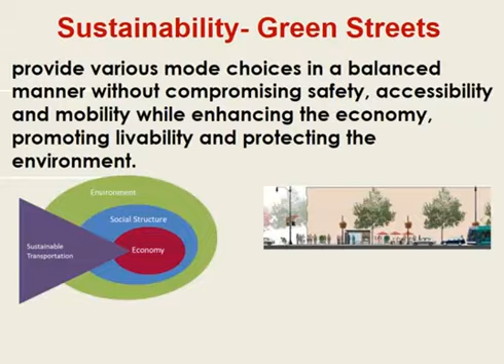We have done and started a number of green initiatives at the department, and I will go through some of those briefly.

Our first step was establishing an environmental policy. Based on that, we established an environmental management system. Those of you who are familiar with environmental management systems, we followed the ISO 14000 structure. We also established an environmental policy and process in the department, basically following the federal regulations, and created a manual based on that.

We have implemented context-sensitive solutions at the department. The department has a complete streets policy. We also developed a sustainability plan a few years ago. And the most recent plan that we have started is the climate change adaptation plan. I'll go through those shortly as we move forward.

We have recently released our LID standards, and those of you who are familiar with the Anacostia waterfront, we did create our design standards or guidelines for that area.

There are a number of people who work in the department on all these issues, so I'm just presenting a lot of those. The credit belongs to everyone who works on them, especially the stormwater branch, who's not here, but they were nice enough to give me some slides to present today.

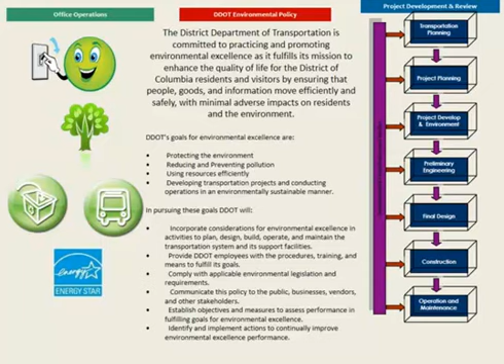This document was released almost 4 years ago, and the plan itself asks for an annual reporting mechanism that can be used to improve the process.

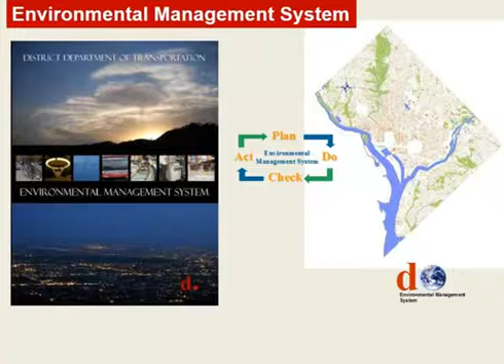The next thing that we developed was a sustainability plan, and based on that we highlighted 8 key areas: promoting transportation and land use, improving modal choices, effective cost assessments and decision making, improving DDOT operations, protecting the environment, conserving resources, developing climate change adaptation, and promoting livability and safety.

Based on those focus areas, we have developed performance measures that can be monitored.

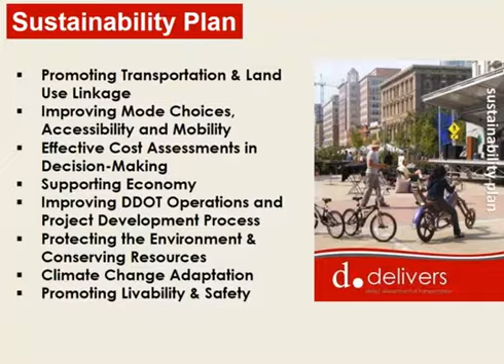A few years ago, Federal Highway was very keen on implementing context-sensitive solutions. It is a great way of actually making your projects sustainable. We worked with Federal Highway at that time, and we were one of the first few states after the first 5 pilot states to start using this process in our project development system.

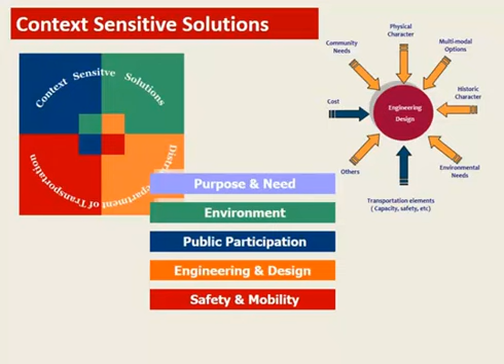Since the department uses federal aid funds on a number of projects, we also have to comply with federal regulations as well as local regulations. Based on that, we created our environmental process manual a few years ago, which includes all of our processes to comply with the requirements of NEPA, Clean Water Act, Historic Preservation Act, and a number of other laws and regulations. We constantly update it with new coming regulations.

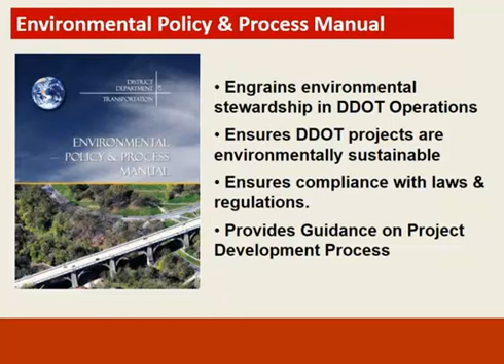The last update was done only last year, and actually all of these documents are available on our website if you want to take a look at them. Our most recent plan or project is the Climate Change Adaptation Plan.

There's a lot of focus right now on climate change, particularly in the area of climate change action plans. Ours is a little different - this is where the Department of Transportation is going. If you talk with AASHTO or Federal Highway, it's much more about adaptation now than coming up with action plans. We started this project last year and finished it in December.

The plan was released in December and it's on our website. In that process, we looked at the state of the art and the state of practice. There are a number of climate change indicators, as you know: temperature, sea level rise, precipitation. Those of you who were in DC during Snowmageddon saw that, or the recent thunderstorms and hurricanes we faced. Based on the review we did, we found 3 key areas that actually affect DC the most, and it will depend on your state or city. But for us, temperature, sea level rise, and precipitation were the 3 key areas that affected DC the most.

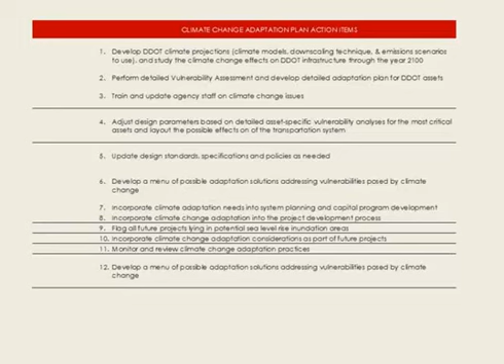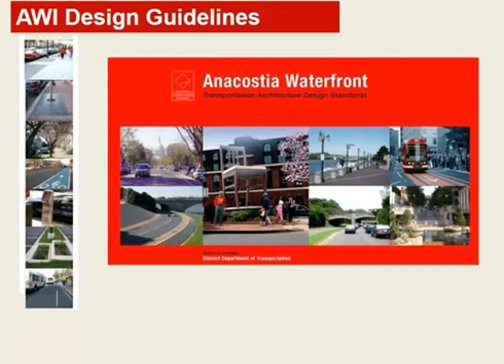This document is also available online, and you may have seen this repeated many times in our presentations. Low impact development is actually one of the key areas we also work in. We have a stormwater branch, which is the lead on low impact development, and they recently released our new LID standards, which we did not have before. I know Pete Hill from DOE is probably going to speak more to that, but I just want to cover that briefly - we do consider low impact development in our transportation projects, and we've been successfully using them.

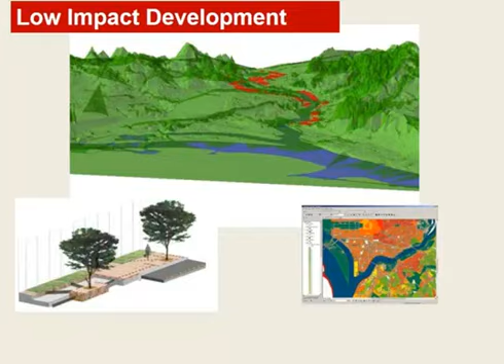Some example projects.

The first one I was going to highlight is the Klingle Road project. This was recently completed, and one of our most controversial projects - it took us almost 10 years to get it through the environmental review process. In the end, the design we came up with would enhance the stream that runs parallel to the abandoned roadway. The roadway will be converted into a bike trail, and a law was passed asking us to actually convert the roadway into a bike trail.

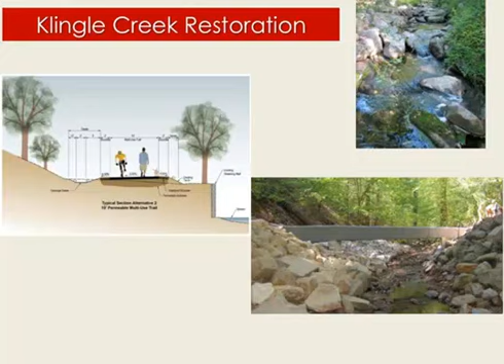However, in order to make the project work, we had to work with National Park Service, EPA, and DOE, and come up with an innovative solution for the Klingle Creek, which runs parallel to the right-of-way. We ended up enhancing the stream itself - almost half the cost of the project is for stream restoration and capturing stormwater runoff, not from the transportation right-of-way, but from the adjoining land uses. That was one of the key things that helped us get the project through, because without the stream restoration and enhancement, the project likely would not have been able to move forward. That was one of our key successes in 10 years or so.

The Nannie Helen Burroughs project was one of the Green Highways Partnership projects. Dawn and her team helped us a lot on that one. It also received a grant from EPA to implement stormwater management and LID practices. The project is almost done - I think it's done - and included a number of LID techniques, including bioswales and bioretention cells. This project is in the northeast area near DC 295.

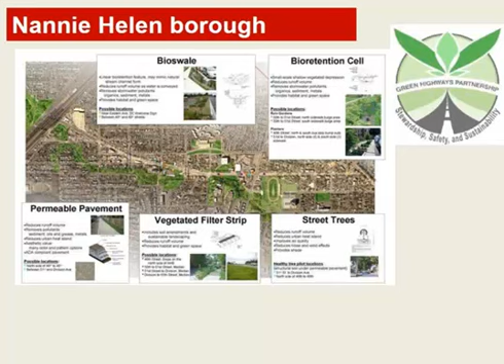My last slide is about Oregon Avenue, which we recently completed. This is again a roadway which runs parallel to a stream near Rock Creek, actually runs parallel to Rock Creek as well. Stormwater has been one of the main issues for the deterioration of the roadway. Again, it took us many years, almost 7 to 8 years, to get this project through. However, we came up with some innovative solutions for this project.

We worked with Dawn and her team on this one too, and came up with managing the stormwater in the transportation infrastructure by using spot LIDs, but also incorporating tree boxes as LID units. We were able to capture and meet all the 1.2 inches retention standards, but were also able to maintain the transportation interest by getting the project through.

It took us many years to get this project agreed upon by DDOT, NPS, and Federal Highway - that was one of our key successes. Again, looking at the project through sustainability and stormwater management actually helped us move the project through. And that was all I had.

I do want to acknowledge other people who actually helped me with these presentations - Meredith Upchurch and Reggie Arno from our stormwater branch, who do a lot of work in LID and stormwater management.

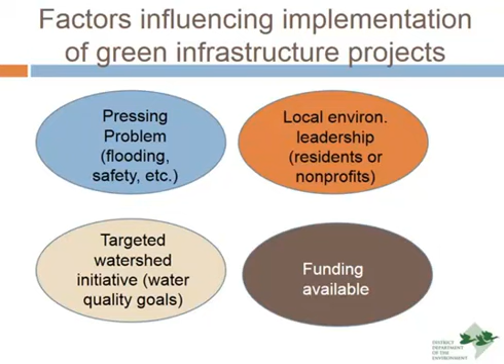Okay, next slide. Oh good, there, now it's up.

Additionally, I'm going to discuss these design charrettes, but also, through a separate process, DDOE worked with communities to install LID practices through a program we called River Smart Communities. This is kind of a unique feature of what we're doing here. I think the small-scale projects on the multifamily housing units complement the design work on the streets and build mutual support.

Although DDOE is not generally tasked with roadway problems, I don't want anyone to think I'm a roadway engineer, but we nonetheless learned about residents' issues through these design and community engagement projects. The issues that came up most frequently were safety related to high-speed traffic, and flooding generally caused by clogged catch basins, but not solely. Both these concerns are actually great motivators to get communities to embrace green streets. Rather than building a lot of speed bumps, as you can see here, which we have many of in DC, green streets can actually slow traffic through bump outs, and flooding can be mitigated through properly constructed bioretention.

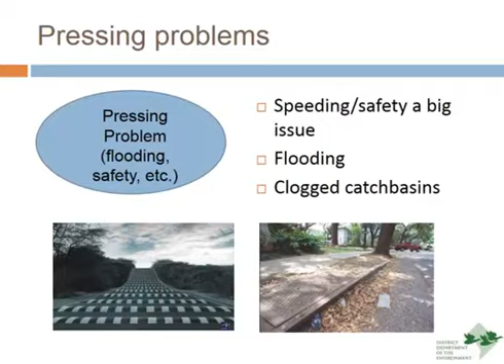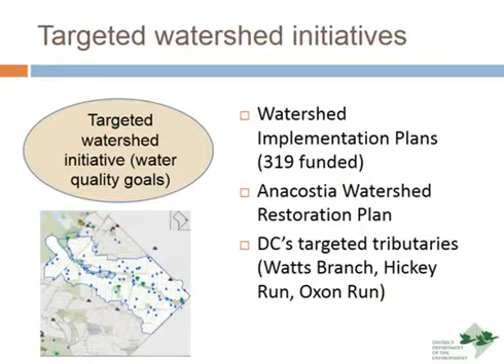A big role of my branch is to develop watershed plans. The purpose of these plans is to focus district efforts towards roadway work, stream restoration, residential retrofits, and a host of other activities that have the potential to improve local water quality. Although it is frequently challenging to direct the efforts of a city to one or two specific areas, two projects I will describe here were located in a watershed that we have targeted. Watts Branch is a tributary of the Anacostia River and has received over $15 million in roadway, stream, and path rehabilitation and homeowner retrofits over the last 7 to 8 years. In these projects, the planning document did focus the efforts of numerous agencies, district and federal.

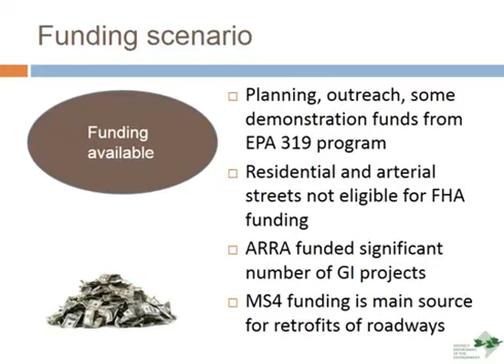The funding picture reveals multiple sources, however each has its limitations. DDOE used EPA 319 funding for the design and outreach efforts that will be described. An important factor for implementation is that residential streets are generally not eligible for FHA funding. DDOT has made use of FHA funding for some of its Great Street projects, which Faisal had mentioned here, which have incorporated lots of Green Street elements. However, the majority of the streets are residential, and thus federal funding is not readily available. We see a major source going forward will be the Clean Water State Revolving Fund and MS4 funding for areas in the district in the MS4, or the separate sewer system.

In DC, we have numerous nonprofits who have taken on the stormwater issue in general. They have played important roles in reaching out to the community and building support. Although there are many residents who are motivated primarily by environmental concerns, generally speaking, in relation to roadways, other issues such as safety tend to trump them. However, Green Streets provide an opportunity to build support by taking care of numerous issues at once.

Getting to the projects, the first I want to discuss is the Jay Street Mayfair Mansions project. This site came to our attention because of ongoing flooding of Jay Street in Northeast DC, which prevented traffic from passing after even a moderate rain event. Additionally, it was in the targeted watershed of Watts Branch, which I mentioned earlier. Although local engagement leadership wasn't a big factor early on, it became a bigger issue during the second phase of the project, the River Smart Communities portion. Importantly, DDOE applied for ARRA stimulus funding for the project and received $600,000. This definitely helped spur the project towards completion.

Here's a picture of the retrofits before and after. You can see the flooded roadway. The storm drain system was directed to Watts Branch, which was only approximately 150 feet away, and was clogged by sediment from the stream. An interesting component of this project is there was really no way to improve the drainage of the existing pipe system without dredging the stream, which would not be allowed or would not be an appropriate solution. The installation of bioretention was really the only way to address the flooding successfully and also achieve important pollutant reductions.

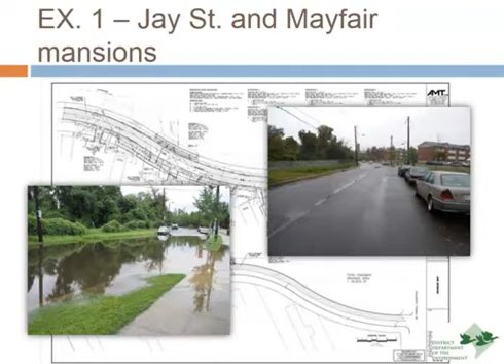As I mentioned, we did apply for stimulus funding, and the street project was constructed to treat over 50,000 square feet of impervious area. A big win for us was that we were able to mitigate this roadway flooding that had been a problem for over a decade.

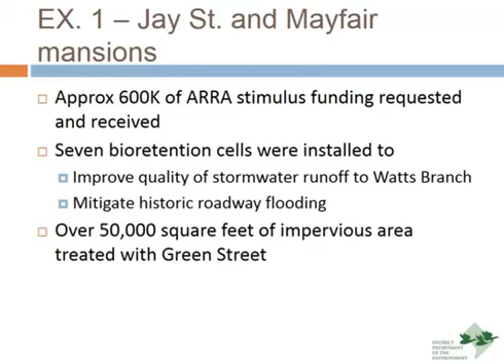Some of our lessons learned are probably familiar to many of you. One big stumbling block was the LIDA design standards that Faisal had mentioned had not yet been approved, so we had some challenges getting approval for inlet designs. There were some safety concerns that were unresolved that became stumbling blocks. However, we did work through them eventually. Also, maintenance and training the maintenance workers on how to treat this particular bioretention cell was an issue initially.

However, having the funding deadline specifically associated with ARRA did help us out. It's a scenario we like to term playing the ARRA card around here, which did help us get through some of these barriers. And here you can see a picture of the installed practices.

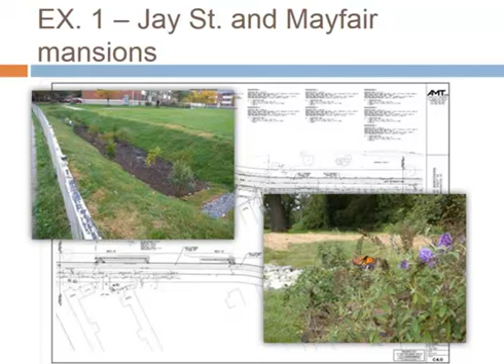The second phase of this is after the project was completed, we went in and worked with the community to install two cisterns, a 500-gallon and an 800-gallon cistern.

These practices were embraced by the community in part because they had developed a community garden which needed water, and we also put in BayScaping and took out a lot of turf. We did this through the program we call River Smart Communities, which provides stormwater BMPs to multifamily residences at advantageous cost share.

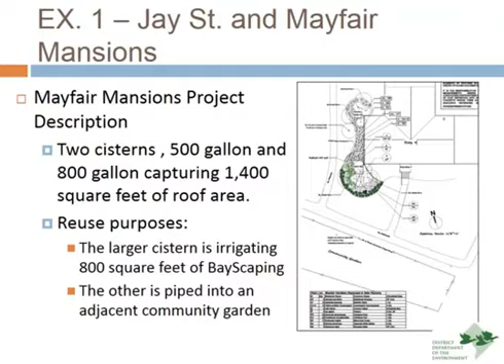Here are the pictures of the cisterns you can see. The reason this project worked, and also the reason we can continue with them, is that the residents saw a great example of these practices working in the roadway. They saw that it solved the problem. As I mentioned, it also helped with their water demand in the garden. Importantly, the local nonprofit Groundwork Anacostia helped build the garden, also helped its acceptance of the stormwater features.

We see this site as having tons of potential. There's 17 large buildings, and the site encompasses over 10 acres. The housing management company is quite progressive about this, which is great. We are finding that with the new stormwater fee based upon impervious surface, where you're charged based upon the amount of your impervious surface, wise property managers see an opportunity to reduce the fees in the long term, and this has really helped us. They also own several other properties in the district, so we're currently working with them to do more.

In just a little detail about that, we're putting $350,000 next year towards the retrofits of these properties, and our current funding breakout is that we are providing 60% of the construction costs, and the property owner is putting in 40%, up to a certain maximum.

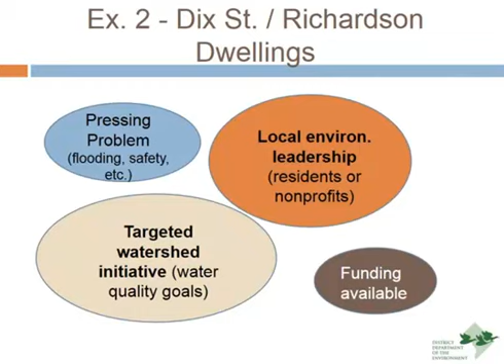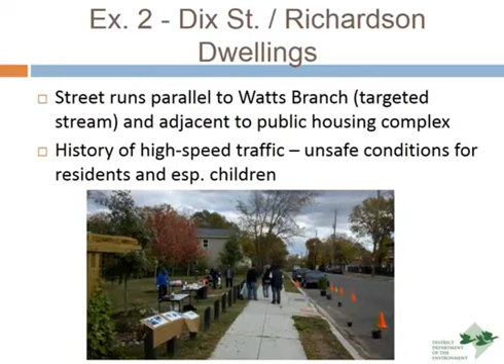After meeting with the residents, safety issues came to the fore, particularly related to speeding traffic and adequate sidewalks. So DDOE in 2010 provided a grant to Washington Parks and People and Sustainable Life Designs to run community outreach and develop 35% designs. Over 150 people were engaged in the process, and it is a 4-block area, quite a big area from Division to 55th.

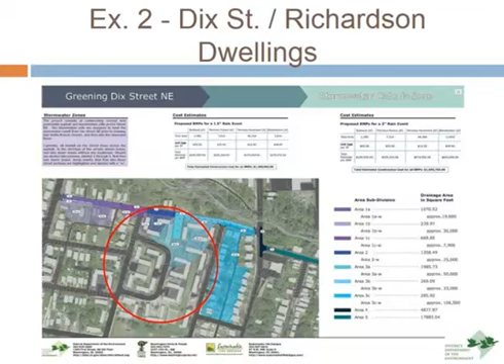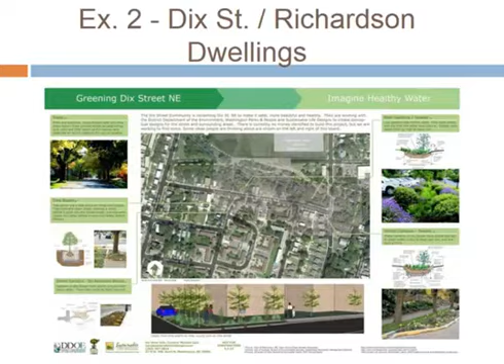And you can see some familiar design options that were embraced by the community, such as bump-outs. Some unique design elements are how the design team incorporated this into the nearby park, creating a more formal entrance.

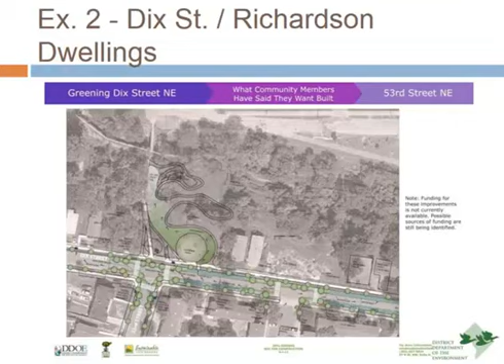So what we learned here was, although residents were interested in stream health, the primary concern was safety and high speeding traffic.

We also discovered that there's a great potential to treat stormwater. Over 6 acres could be treated in the roadway with proper design. And for those of you familiar with DC's MS4 permit, it requires that the district retrofit 34.4 acres of roadway in a 5-year permit cycle. So this would be a really good project to help us meet that requirement.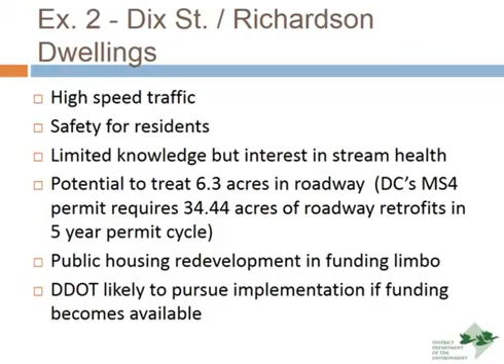Some of the question marks are the fact that the public housing redevelopment is a little bit in funding limbo. But DDOT is likely to pursue implementation if we can find some local funding. This is one where FHA funding would not be available.

So the third project I wanted to discuss was a site in southeast DC. It's in the Oxon Run watershed. The cross streets are 13th and Valley, and the community is called Wheeler Terrace. So the design team was led by Casey Trees and Greening Urban, and they engaged this multifamily housing complex in design charrettes.

We issued a grant, as with the other sites, approximately $60,000 to do the design, stormwater calculations, and the outreach. This particular project is adjacent to Oxon Run, which has numerous water quality impairments, and DDOE had developed about the same time a watershed implementation plan for Oxon Run, which was approved by EPA.

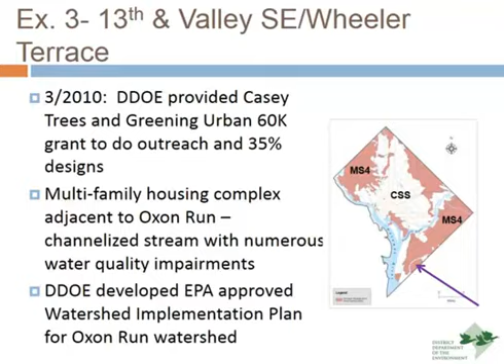Just to bring it back to the stream, this particular stream has a lot of the problems that you would expect to see in an urban area. We have a flashy hydrograph driven by stormwater flows, some eroded sanitary sewer lines, eroded and unstable banks, and lots of trash.

Here you can see the site a little more up close. You can see the channelized stream at the top of the photo, and the retrofits focused on this area at the intersection, although many of these practices could be extended along Valley for quite some ways. This is a district park that the complex is adjacent to, and you can see the sites in the courtyard where we installed the cistern and the rain garden.

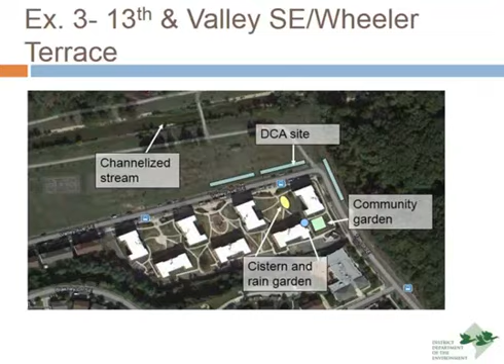And on the south side, numerous stormwater features such as silva cells and tree trenches were incorporated. This was Casey Trees that did the design, so it's nice to see those practices, and these were designed to establish a nice tree canopy in the area, which it did not have.

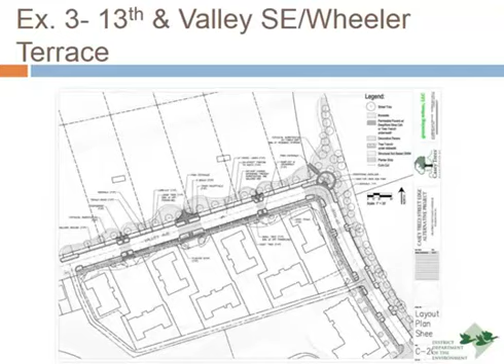And the unique part of this grant is that Casey Trees hired residents to assist with the community outreach and organizing. It's a big issue in this particular community with 22.5% unemployment in Ward 8. Translating this work into jobs is extremely resonant in this community.

Another component is DDOT has a bike trail that's going to be going in that same area, and this might help spur the implementation. We're also hoping that now the residents are savvy about stormwater, they'll be able to push for this project. The speeding issue was immediately addressed with speed bumps.

However, we feel if the Green Street project was implemented, we could do the same thing. Now, after this design project, we went to these residents and we worked with them to install a rain garden cistern, and this will be installed in May, shortly.

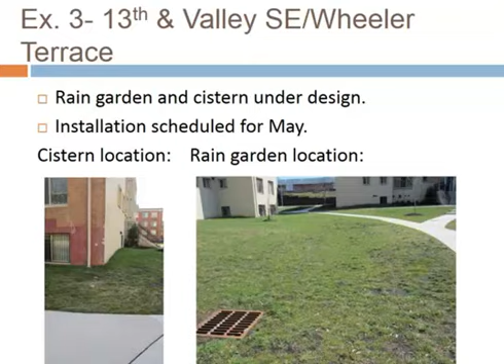This worked here because the community garden really is the focal point for this multifamily residence, and it's actually the same management company, which, as I spoke before, is very dialed into this and is a really great partner. So we're excited about this project and see great potential for it getting constructed.

Similar to Mayfair Mansions, these are big buildings. There's a lot of space. 100% capture really is achievable in a cost-effective manner. And the management company is interested in scaling up, so we will be working with them.

The last project I wanted to discuss is Everett Street in Northwest DC. It drains to Rock Creek. This area had a really strong local leader who also, there were some planning initiatives with our district Department of Planning that had looked at this area.

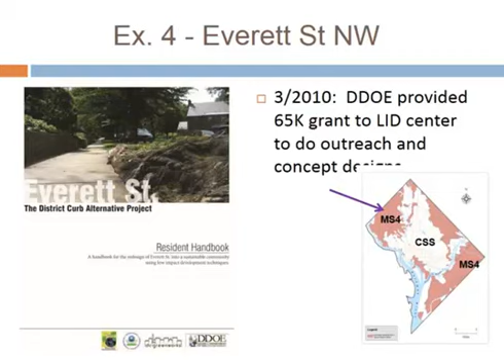So we chose this, and we worked with LID Design Center. They did the outreach and charrettes here. They took a slightly different approach. They held lots of meetings, but they produced a handbook which the residents could use to educate themselves about a whole host of stormwater practices. And you can see these are some cutouts from the very nice handbook that they produced.

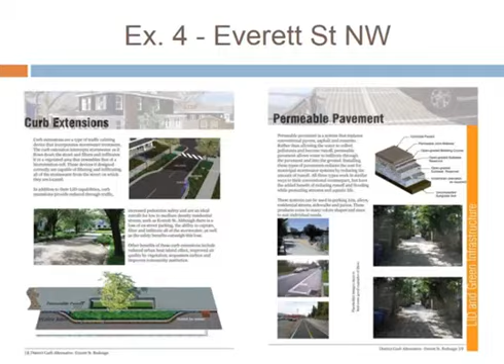This particular area, the issues were about cut-through traffic. It was in between Nebraska and Connecticut Avenue, which are major roads, and a lot of people were cutting through to shorten their commute.

The alleyway was a big issue, mainly because it was a drop-off area for a daycare facility, but residents were concerned about cars speeding in that area.

Currently, funding is not available for this particular Green Street, although numerous residents have taken part in our RiverSmart Homes program, which is similar to RiverSmart Communities, however just targeted towards single-family homes. So these residents are also interested and ready.

One issue in this particular area, going back to the picture of the trees, we found that the tree canopy was actually a problematic issue. They had some nice trees, and incorporating stormwater treatment there without damaging the trees was an issue.

In this picture on the right, you can see there's quite a bit of space in this instance, but in much of the street, the existence of a large canopy was a design challenge.

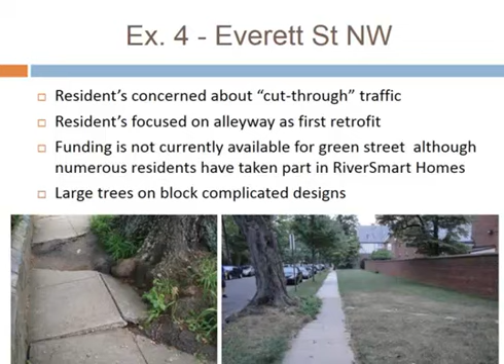And that's all I had to explain our efforts, but I look forward to any questions you might have. Thank you so much for listening.

Pete, that was super. Really enjoyed that presentation, and clearly there's a lot of greening going on in the district.

Let's take some questions. One is you've highlighted that not all local streets, or in fact all DC streets, are available for or actually candidates for federal funding, and I think Fazil indicated that as well. What about the market? Could you perhaps talk about some interest there, the credit program, and perhaps what DC and DDOE sees as some opportunities through which to address or retrofit these streets?

Sure, that's a really promising avenue. DC has developed a stormwater retention credit trading system, and the general gist is that new development would need to capture, I believe it's 0.75 inches of the 1.2 inch retention credit requirement on site, but that remaining portion of the requirement could be met by others doing the work in different parts of the city.

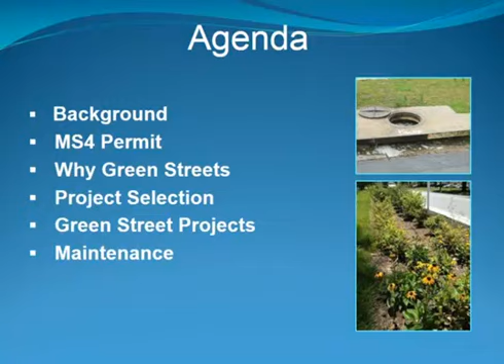To give you a little background on Montgomery County: it's about a 500 square mile county with about 1 million people who speak 184 languages, which makes it a challenge to get our message out. About 12% of the county is impervious, approximately the size of Washington, D.C., and we have about 1,500 miles of streams, with 2 major basins—primarily the Potomac drains most of the watersheds, while about 12% of the county drains to the Patuxent in the east. We have 8 primary watersheds.

In 2010, Montgomery County was issued an updated stormwater permit, or MS4 permit, which requires us to treat 20% of our impervious area that is not controlled to the MEP, which equals about 4,300 acres in the county.

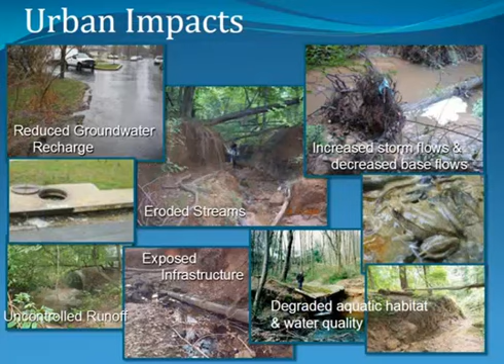One strategy of the permit is to implement green streets. The idea is to treat runoff close to the source, since about one-third of the impervious area in Montgomery County is roadways. We do this by utilizing what we consider the green panel—the green patch between the curb and sidewalk—and by reducing the cross-section of roads where appropriate, and utilizing adjacent green space along roadways. We are not upgrading the whole infrastructure of the road; we are just retrofitting the existing road as it is in the landscape.

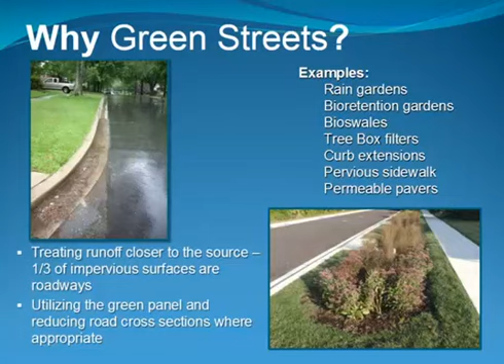Some examples of the practices include rain gardens, bioretention gardens, bioswales, tree boxes, curb extensions, pervious sidewalk, and permeable pavers. The reason we're implementing green streets is to maximize stormwater management, improve stream conditions in Montgomery County, improve water quality treatment, and encourage infiltration.

As part of Montgomery County's MS4 permit, we're required, as I previously discussed, to treat 20% of impervious area that's not controlled to the MEP, or 4,300 acres. We also have a Potomac trash treaty which the county has signed on to, and we have various TMDLs plus a trash TMDL for the Anacostia. Also, part of our permit is to increase the use of environmental site design, or low-impact development.

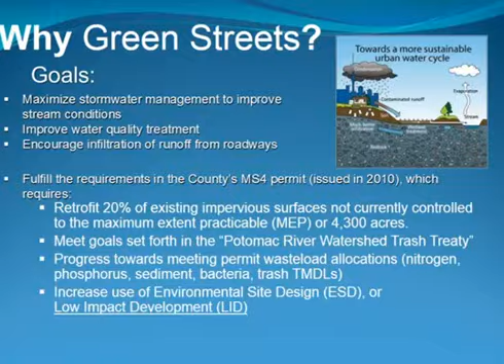As for project selection, our projects have been selected through either the Anacostia Restoration Plan, a cooperative effort between the Army Corps of Engineers, Prince George's County, the District of Columbia, COG, and various other partners, or through other watershed studies that were pulled together into our countywide implementation strategy, which is our roadmap for implementing our MS4 program.

On top of that, we've coordinated with our Department of Transportation when they are doing roadway maintenance and other rehabilitation work within the right-of-way. That gives us an opportunity to go in and implement projects, coordinate with the Department of Transportation, with each department impacting the area once and then pulling out, hopefully making the neighborhood much greener.

As for some of the Green Street locations, first in Sligo Creek, we have a series of 7 projects. One has been completed and various others are in design and construction. Today I'll emphasize just a few of these projects that primarily focus on Rock Creek and the Anacostia watershed.

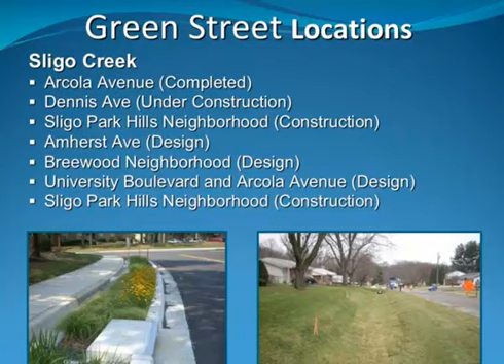In Northwest Branch, we have one project currently in design. In Paint Branch, we finished White Oak, and we have Anderson Street and Tanley Road neighborhoods that are in future contracts, which will be finalized by the end of the fiscal year. In Rock Creek, we have two other projects slated for design: Wheaton Woods and Glenmont neighborhood. They should be completed under contract by the end of the fiscal year.

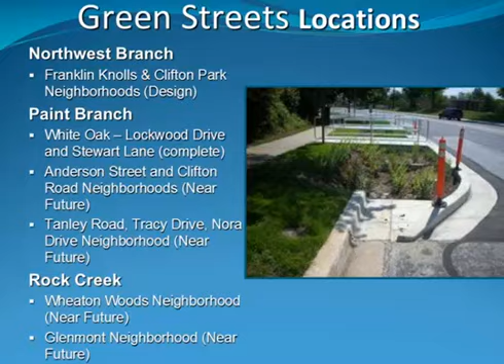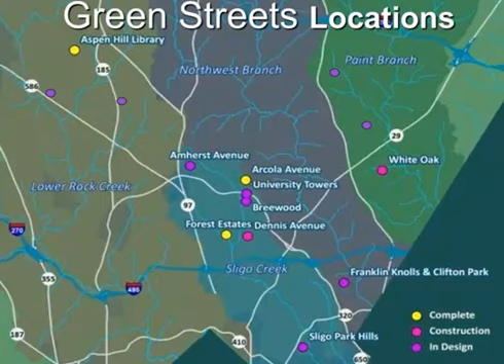Arcola Avenue is one of the first projects we built with the Department of Transportation. It was identified as a project where the Department of Transportation came in along Arcola, which had a lot of pedestrian activity, being an arterial road and a cut through. There were impacts on pedestrian safety and speeding along the road, so they came in and put traffic calming features in, which did not incorporate a lot of landscaping features at all. So we came in with the Department of Transportation and integrated the LID into these areas, behind the curb and also within the shoulder area.

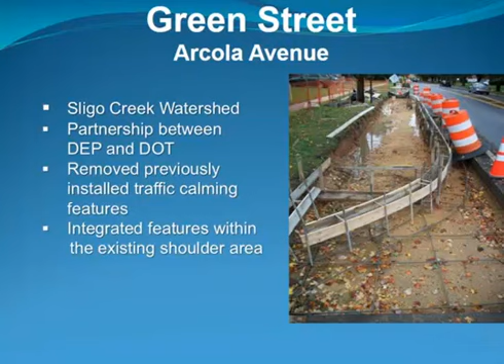Some of the key design considerations: subsurface utility investigation was one of the first steps, which is extremely important when you're working in the right-of-way. We use a private utility locator, and they collect all the information and integrate it into the CAD design very early on, so you know where all your utility constraints are.

One primary component was reinforced curb. The reason for that is the stability of the snow plows and the abuse that curbs take within the right-of-way. It's really important to provide that stability and to limit failure with bump outs.

Pedestrian safety is also a major component, especially when you have a lot of activity, people walking to synagogues and using the sidewalk. Maintenance of traffic is an important component for us too. During construction, it's important for the safety of the workers, and is a very expensive cost item, especially on the very busy roads. Typically we have to shut down a lane, do the excavation, add the soil, and so forth, so we have a small window when we can do that during traffic hours.

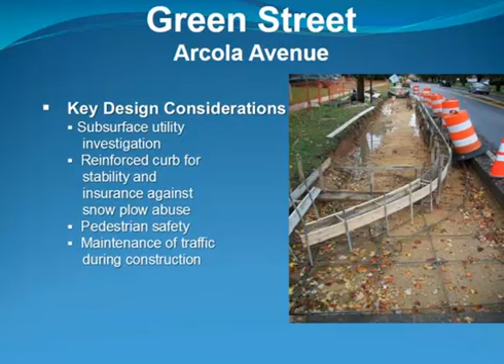Arcola was completed in 2011 in cooperation with the Department of Transportation. It treated about 2.4 acres, which included 8 bioretention cells and flow-through bump outs, at a cost of $640,000.

The next project is Forest Estates, a more neighborhood-focused project located in the Sligo Creek watershed, another partnership between the Department of Environmental Protection and the Department of Transportation's Renew Montgomery program. In this program, Montgomery County's Department of Transportation goes into prioritized neighborhoods and replaces in-kind curbs, sidewalks, and asphalt. They mill down the asphalt and resurface, so we partnered with them to integrate stormwater management as a component of their project.

We were integrating projects primarily behind the green panel, or within the green panel behind the curb and sidewalk. You have to note that many of these are in front of people's homes, so they're used to using all their yard up to the curb, which they maintain, and so it required a lot of coordination.

Some key design considerations are, of course, subsurface utility investigation, geotech, and reinforced curb, as I spoke before. We also factored in the street trees along the right-of-way—there are a lot of mature trees—and considered how to integrate our designs to reduce impacts on the critical root zone, since trees are assets of the community, and we need to protect those as necessary.

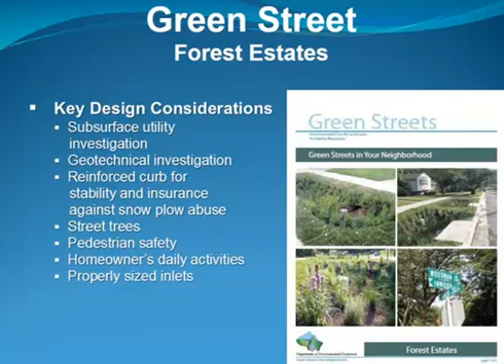The Forest Estates project included practices involving bioretention gardens, rain gardens, and grass bioswales, and it was also a Rainscapes neighborhood. This was a targeted neighborhood where we have another program through Rainscapes where we work on lots to integrate various LID practices. So people recognize that it's not just the road contributing to runoff impacting the streams - it's the residents, and everyone has a stake in improving water quality.

Here are some of the projects we identified. We originally identified over 45 projects, and through a lot of outreach with the public and design constraints - which could be utility, soil infiltration, or grading and slope issues - it was reduced down to 24 projects, or 24 sites.

We did a series of walks with the neighborhood, with residents. We brought out the designs and met with each resident where the facilities were going to be located, and that was a continuous process throughout the design. It's quite involved and very important to engage residents. The feedback from them is they want curb appeal, which is understandable since it's in front of their house. So integrating all that design to make it look functional and aesthetically pleasing.

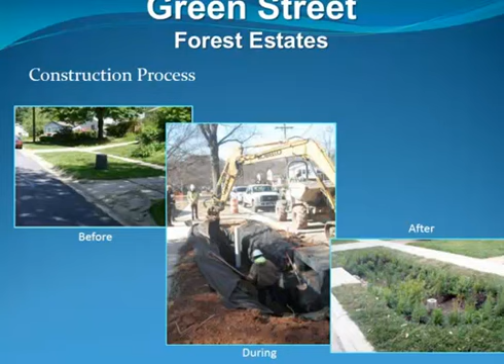Here are just a few pictures showing the area behind the curb, excavation, and then the final product. Here are some more examples. Overall, the 24 facilities treated 5 acres of impervious surface with a total cost of $815,000, which included design and construction, and it was completed in 2012. There's a link there if you'd like to look at our designs and go into further detail with pictures and the website.

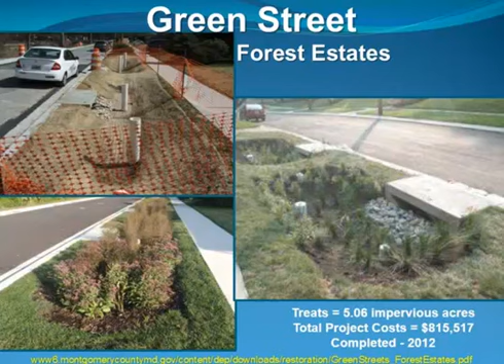Dennis Avenue is an adjacent arterial road near Forest Estates, about a mile long. It's in the Sligo Creek watershed, and this is another partnership between DEP and DOT, where we're integrating green panel features in the median and using the adjacent open space, as you can see in this photo, to integrate a long swale that'll pick up runoff from the roadway.

Again, key design features - subsurface utility investigation is extremely important. This area has all kinds of utilities: gas lines, water lines, sewer lines, and overhead power. So a lot of constraints and a lot of infrastructure to work around.

Geotech was really important because it's limited in what amount of storm drains is available, to determine if we can get enough infiltration, or if we don't need an under drain, or if we do have to incorporate an under drain, how far we have to go to tie that into the storm drain. Reinforced curbs, as I spoke previously. Street trees, again, very important. Also looking at adjacent trees on private property - another aspect we tie in to make sure we don't impact the critical root zone and damage trees on private property.

Pedestrian safety, and also recognizing what the homeowners' daily activities involve. Emergency snow removal was something we learned at one of our public meetings - we had ideas where we wanted to put bioretention in the median, but after speaking with residents, they said during an emergency snow removal period they have to move their cars from the road, and since they don't have driveways, the only place they can park is the median. So where we had proposed a bioretention cell was their parking spot for heavy snow. That's a really important component - don't always assume you know the best place where a facility could be built. It's working with the property owners; otherwise you get a lot of pushback, and their involvement integrates the project into one that people accept and support.

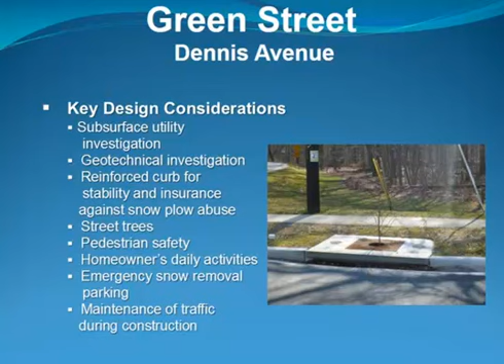Again, maintenance of traffic. Dennis Avenue is a very busy road, it's a cut-through road with a lot of traffic, and it's quite dangerous to work there. So maintenance of traffic is very expensive for us—at times it could be almost half the project cost. We have to shut down lanes, redirect traffic, and integrate the facilities within the area.

Here's an example of one of the bioretention cells we built. The practices integrated include bioretention gardens, tree box filters, curb extensions, parking pads, underground RainStore infiltration devices, grass swales, step pool conveyance in one of the storm drain channels, and Rainscape rebates. We have a rebate program through Rainscapes, and we target areas that drain to encourage residents to build projects on their own property, and they can receive a rebate for various practices.

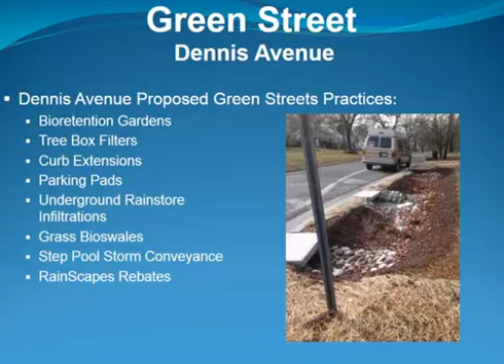Franklin Knolls is located in Northwest Branch. It's another Department of Environmental Protection and DOT Renew Montgomery program, where they are replacing curb and sidewalk and milling down the road, and we're integrating our projects with their efforts.

As part of our outreach walks, we put signs where we're going to put the facility, about a week beforehand, so the residents know we're going to be putting in a facility, what type of facility, and to encourage them to come out to the walk on a Saturday. That brings a lot of people out, and it brings dialogue and understanding to the design.

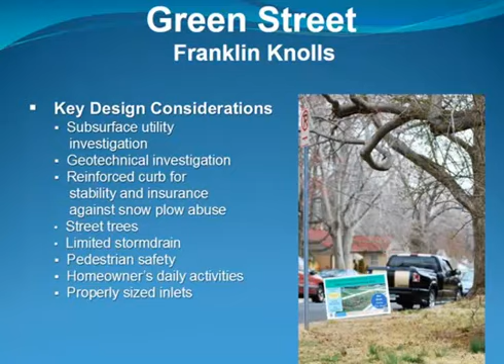Some of the practices installed include bioretention gardens, rain gardens, tree box filters, curb extensions, and also it's part of the Rainscapes rebate program. This is currently in design and nearing construction—we're 90% for the first phase. Total area treats 2.7 impervious acres, or 27.6 impervious acres, at a cost of approximately $2.1 million.

You can see the community walk flyer that we recently had in March. We probably had between 35 and 50 people there, and we presented phase 1 and phase 2 of the design, put out the signs, had a lot of dialogue, and everyone was in great support. We also had the Rainscapes program out there talking about the rebate program and how they can integrate stormwater management onto their own property.

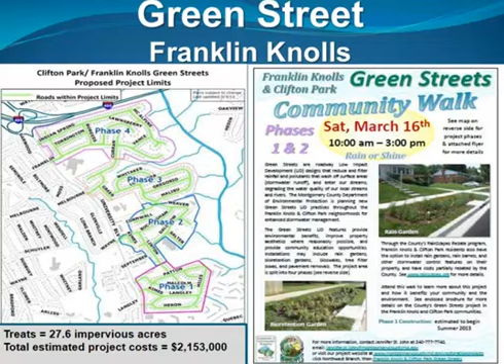Sligo Park Hills is another neighborhood. This is a very challenging site, located in the Sligo Creek watershed. It's another partnership between DEP and DOT, where we're integrating Green Street features within the green panel, traffic islands, median, and any open space that is available.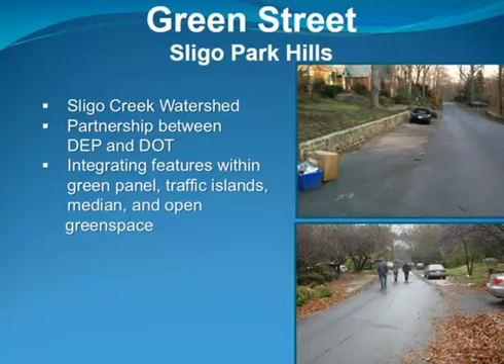Again, some of the key design features: utility investigation—there are tons of utilities along this area—geotech, and curb, street trees. It's a highly wooded, heavily wooded neighborhood, with a lot of mature trees on both public and private property.

So we are looking at impacts to the critical root zone, and during construction doing root pruning and having an arborist on call so we can integrate our designs without harming the trees in the process. We'll probably come back and do a lot of deep root fertilization to help the trees along.

Topography is a key issue in this area. It's very steep, and there are very limited storm drains, so a lot of the road acts as conveyance. During high, intense rainfall in the summer, this road can flood with lots of water coming down the slopes. So the idea of these projects is not to reduce all the flooding, but it will definitely help.

Originally, the Department of Transportation was going to come in and put a lot of storm drain in, and then with public pushback we cooperated with the Department of Transportation and came up with a green design that was able to integrate the LID.

Pedestrian safety is important here. There's a lot of cut-through traffic, and there are no sidewalks, so there's very limited shoulder. Our designs integrate with people walking their dogs, walking through their neighborhood, and walking to school. Again, maintenance of traffic and sizing of inlets is very important.

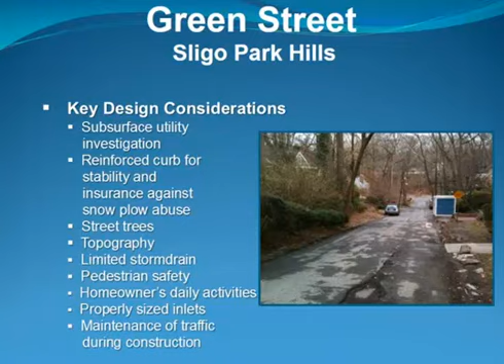Some of the practices integrated into this design include bioretention gardens, rain gardens, tree boxes, curb extensions, and pervious parking pads.

One of the pervious parking pad designs uses a paver system with pre-treatment. A lot of people have built their own parking pads that are not pervious, so we're removing those and putting in a parking pad for them, while also getting the benefit of that being our stormwater treatment for that neighborhood. It's a win-win for everyone, and we've worked closely with the public on the parking pads and how they're going to get integrated into the design.

Also, to gain more volume, we're incorporating rain store into our features so we're able to collect a higher volume. The Rainscapes neighborhood is also involved, and currently they're building rain gardens on private property, which complements what we are doing within the right-of-way.

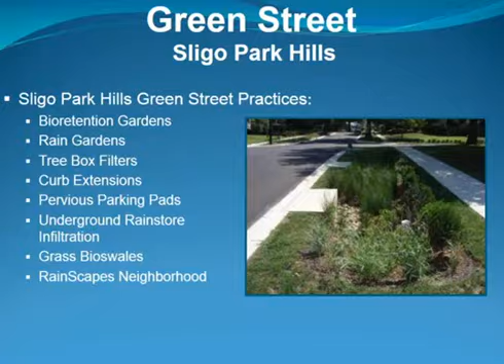Here's an area of Sligo Park Hills. It's a pretty large neighborhood, with over 90 facilities identified for construction. In some of those areas, once we start opening up the earth and excavating, there might be a few changes or a few sites that may drop, and the configuration will be adjusted as necessary. It treats about 19 impervious acres.

The initial cost for the first phase is around $1 million, and with the following phase, approximately $3 million to complete the project.

White Oak is a project located along Lockwood Drive and Stewart Lane in White Oak, Maryland, in the Paint Branch watershed. This is one of our earlier projects where we integrated features within the green panel and also along an existing shoulder. There are areas that have been striped to reduce traffic speeds, and we're able to integrate our designs behind the striped line and the curb.

As you can see, one of our colleagues here is looking at the organic debris in this neighborhood. There's a lot of trash and organic debris, so we're looking at ways where, if we can't incorporate LID practices, we can collect some of that organic material and trash in modified inlets.

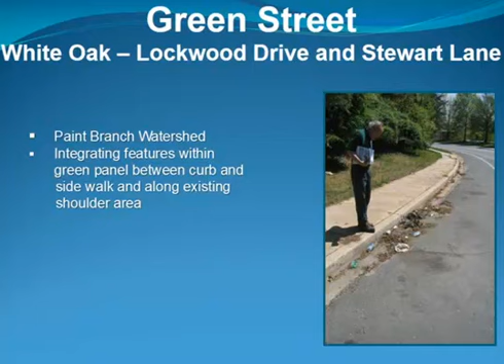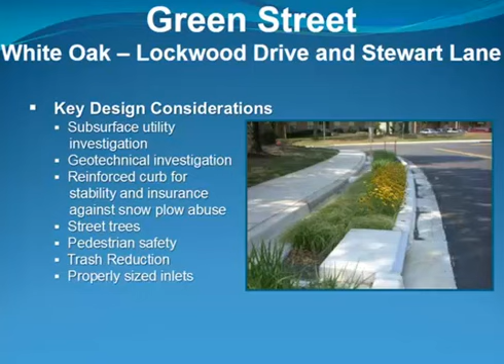In this neighborhood we had a lot of gas lines, so subsurface utility investigation and geotech are very important here. This area of Paint Branch drains very well.

So, the White Oak project: here we're integrating bioretention gardens, rain gardens, bioswales, curb extensions, and modified inlets.

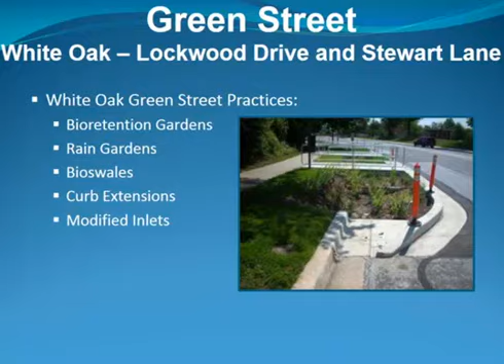I'll show you a picture of a modified inlet. The idea is that where we can't integrate bioretention or any other practice, we're installing inlets where we can collect a lot of the organic and trash debris before it gets relayed back into the stream system. But once you start working on your projects and looking at what's along the curb line, it's amazing what you find there.

So at White Oak, we treated 7 acres at a cost of $1.1 million. We identified approximately 20 projects or facilities. You can see on the right side we did a long linear swale, and at the top we did a bump out, among the various practices throughout the project.

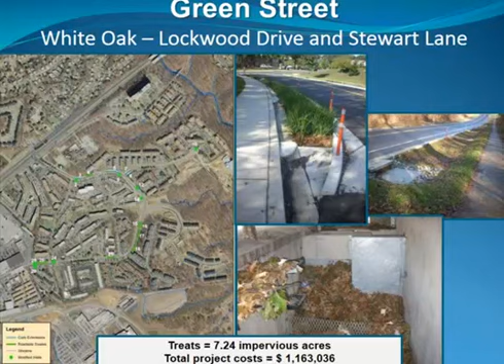Also part of our program, we have the Rainscapes implementation. This complements what we do in the right-of-way, and it's very similar to the River Smart program. We have a neighborhoods program and a rebates program. The rebate program provides rebates for residents to implement practices like rain gardens, conservation landscaping, urban trees, pavers, pavement removal, green roofs, water harvesting, and dry wells. In the Rainscapes neighborhood program, we work in targeted areas surrounded by our capital improvement programs, and residents implement projects on their property while we pay a portion of the installation. To date, Rainscapes has implemented over 450 projects and treated over 11 impervious acres through the rebates and neighborhoods program.

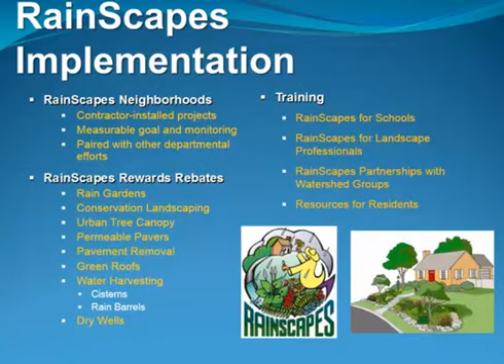Building projects also requires maintenance, and we have a maintenance program that's been very active over the years, funded through our stormwater utility program. We have a contract through our maintenance section that goes out and maintains the Green Street practices monthly, and they're inspected by our county staff. It's important that if we're building these projects, we maintain them to ensure they function as designed, and address any issues that may arise over the long term.

Some monthly maintenance practices include weeding, leaf, debris, trash, and sediment removal. We get a lot of sediment in these facilities and inlets, primarily sand and road grit picked up from tires and the landscape. Once these collect in the facilities, having cleanup pads below your inlet helps, and we also have a weir we can pull out behind the inlet so we can get in there and shovel out the material. This just provides more longevity to your practice.

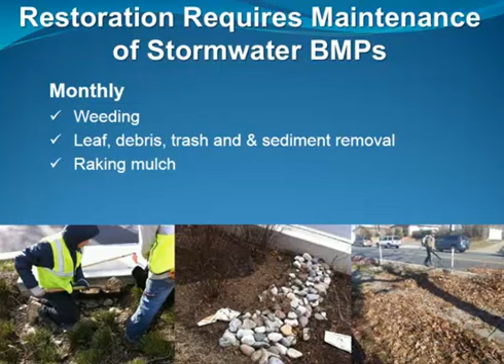Seasonal maintenance includes pruning, mowing, edging, replanting, and media and mulch replacement. We've primarily not replaced media, though we did have to replace some in a few facilities, but that's not a common practice. Mostly we're replacing mulch, mowing, pruning, edging, and doing some replanting depending on winter damage.

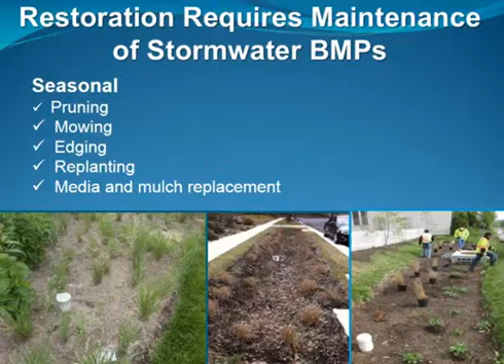Here's our budget for the CIP program from fiscal year 13 through 18. Highlighted are our roads CIP budget for FY13 and 14: $13.4 million dedicated, plus we were fortunate enough to receive grant funding from the Department of Natural Resources. We received $14.5 million through the Chesapeake Bay Trust, which is helping us implement a lot of our roadway projects.

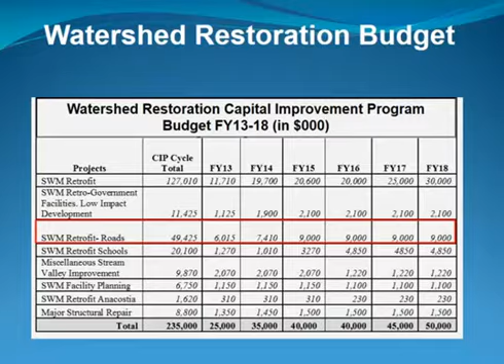This map represents the various Rainscapes and CIP projects throughout the county. You can see them clustered lower in the part of the county where a lot of the urban projects are. We're updating this slide as it gets updated with all of our projects through FY13. We're approximately halfway to meeting our goal for our MS4 program. Currently most of the projects are in design, and this summer we'll be implementing a lot of them.